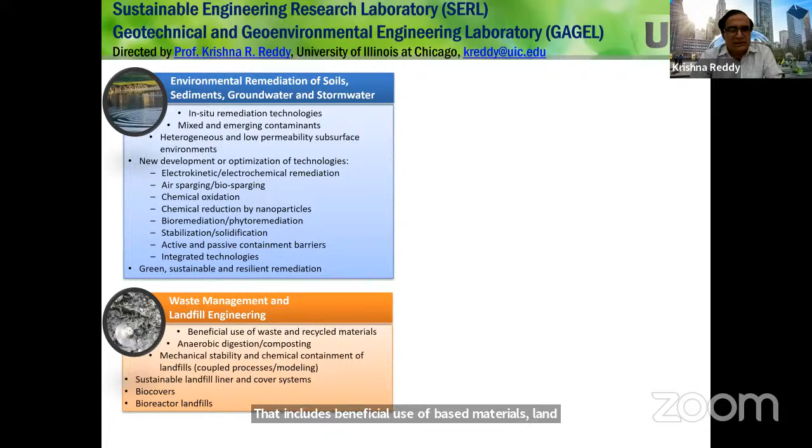And then for the past few years, I've been working on life cycle assessment and sustainable and resilient engineering. Here, I'm more focused on developing assessment frameworks that can be applied in any engineering field. So in my case, I applied the sustainability assessment frameworks to assess sustainable infrastructure, waste management systems, remediation systems, and so forth. So it has very broad applications. And then my background is geotechnical engineering.

My master's and PhD were in geotechnical engineering, but my bachelor's, as many of you, is in civil engineering with structural engineering as a specialization. These first two topics you see, environmental remediation and waste management and landfill engineering, come under the subject of geo-environmental engineering. Whereas this third one, life cycle assessment, sustainable and resilient engineering, is kind of very broad and has become a very hot topic these days.

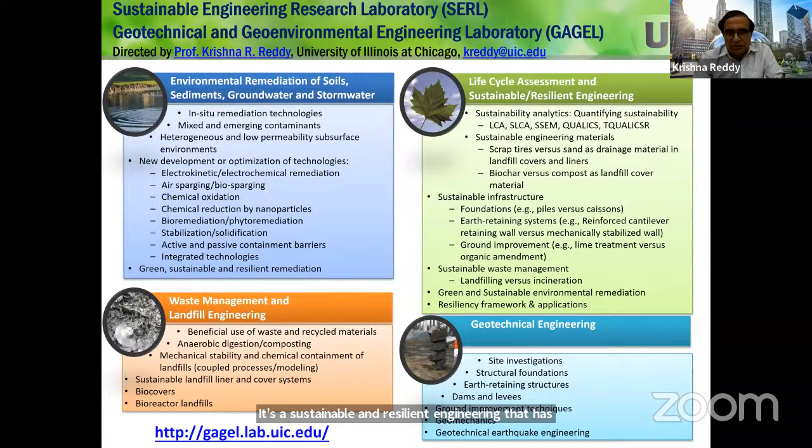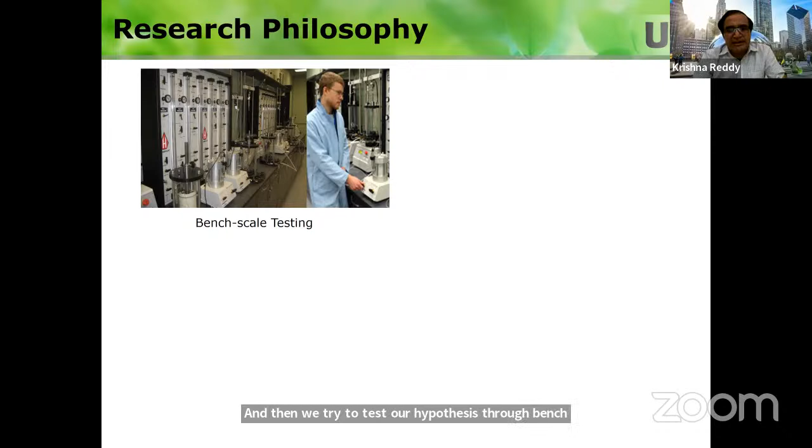I just want to give you a little bit about my research philosophy. We identify a real world problem. What is the problem that is there? And we try to come up with a hypothesis for a solution. Then we try to test our hypothesis through bench scale testing in the lab. And if we find success, we scale up and do the testing in the lab again, because it's easy to do testing in the lab compared to doing anything in the field, because in the lab we can systematically control the variables and understand the fundamentals.

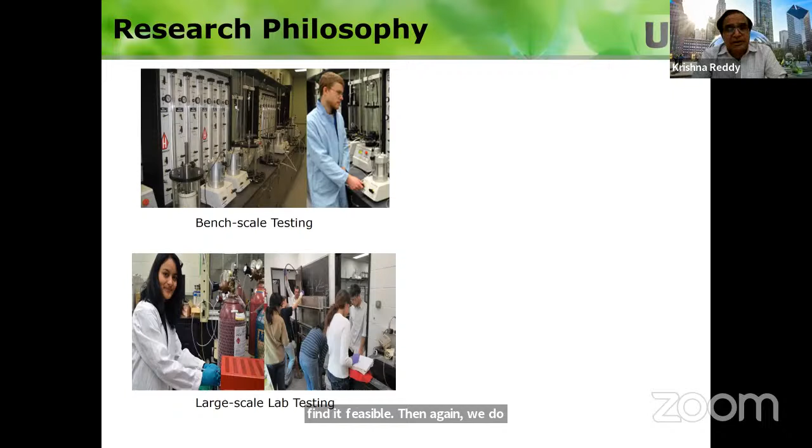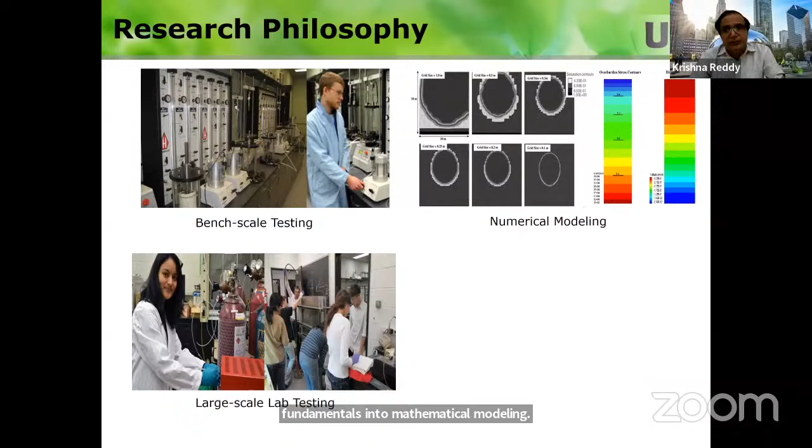Again, in the large scale testing, if we find it feasible, we try to understand the fundamentals, and then we incorporate all these fundamentals into mathematical modeling. Mathematical modeling is a way to scale up what you have done in the lab to a field scale scenario. Through modeling, we scale up and design the field systems.

In the field systems, we first want to test if it works or not. So we do a small scale pilot scale testing. We go out to the field and do small scale testing in a small area and see if what we came up with is feasible or not. If it works out in the field, then we develop design recommendations for practitioners to use and implement those solutions. We follow this systematic approach in all the projects we work on.

We are in a university, so our duty is to advance the fundamentals, but we have an obligation to the society to solve real world problems. So I always say that we are advancing the fundamentals, while at the same time trying to develop very practical solutions to real world problems.

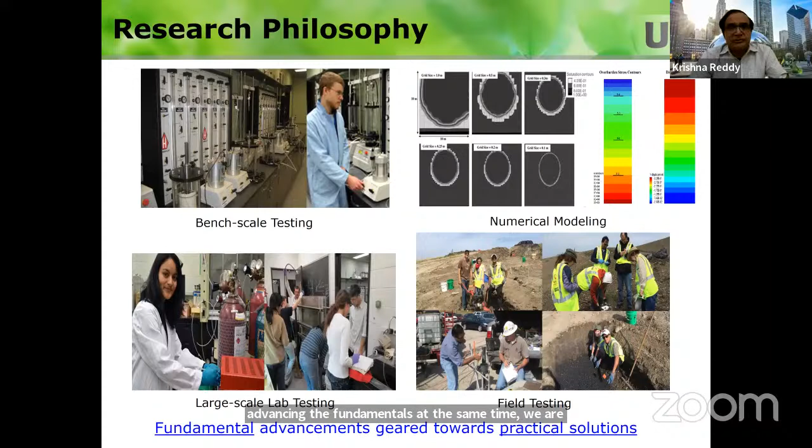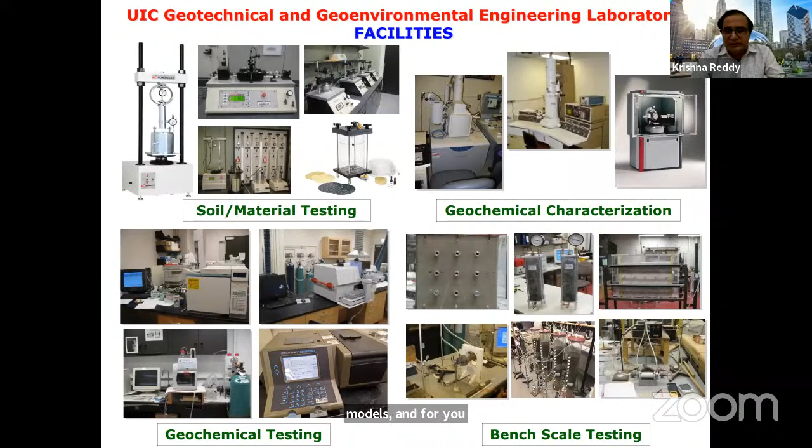So I do a lot of experimental research. This is my lab. We have soil and material testing equipment, geochemical characterization equipment, geochemical testing equipment, and bench scale testing setups. Depending upon the project, we create small scale models, and for small scale or large scale lab testing, we use these things.

Over the last 25 years, I have had the privilege of working with research students and scholars from all over the world. In the US, we get students from all over the world, so it's very nice to work with these talented students. Not only do we work together on technical issues, but it's very enriching to interact with a culturally diverse research group. We talk about language, food, social activities, and families, so it's a very enriching environment.

I always tell people I have the best job in the world, not only because of doing interesting technical stuff, but also in terms of interacting with these research students and scholars. So I really enrich my understanding of society and cultural aspects through these interactions.

So let's come back to the presentation. As I said, I want to give you a brief introduction to geo-environmental problems, and then explain some of the geo-environmental engineering solutions that we have. Going forward, we need to be thinking about geo-environmental engineering solutions that are sustainable. So now the question is, how do you say an engineering solution is sustainable? How do we quantify the sustainability? I'm going to show this through two examples so you can understand this.

Many participants are from India, and in India, you don't have proper engineered landfills. So you have mostly dump sites, and dump sites can create a lot of problems. You have air emissions, water pollution problems, and land contamination. You hear in the news all the time that a landfill is on fire and it's emitting all kinds of gases. That is obvious, you can see it, but a lot of things you don't see are leachate infiltration into the subsurface or into the surrounding water bodies, contaminating the waters and the land surrounding it. So a lot of health issues and damage to environment as a result of these uncontrolled waste dumps.

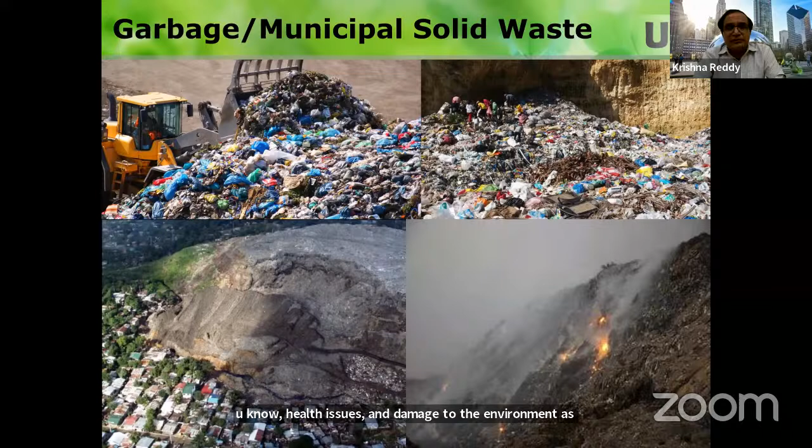You also have a lot of industries generating a lot of hazardous waste, and you wonder what they're doing with this waste. Not everything is recyclable, and eventually some of these things have to be gotten rid of. A lot of times these things are thrown indiscriminately, and you have a lot of toxic substances that enter into the ground and into the groundwater, or through surface runoff, into the surface waters. So it's a huge problem with these hazardous waste issues.

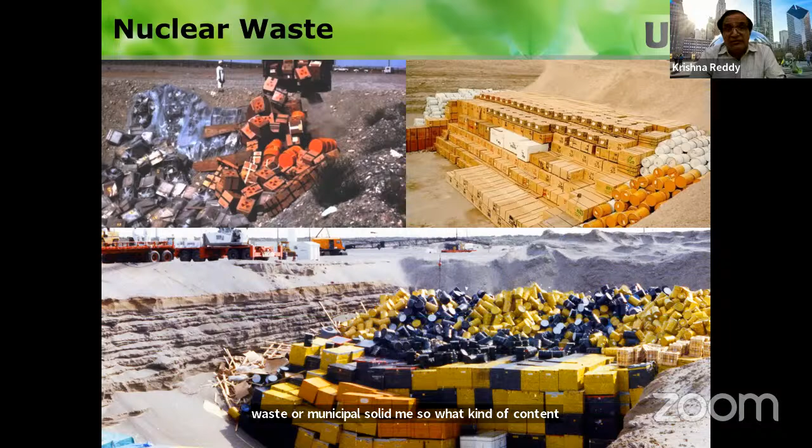Then you have nuclear waste. Nuclear energy is considered as zero greenhouse gases, and it's considered to be clean energy. But the biggest problem with nuclear energy is the creation of this nuclear waste, and this is going to persist for many years. So what do you do with these things? A lot of times we contain it, and the containment facilities for this highly toxic nuclear waste have to be much more stringent than hazardous waste or municipal solid waste. So what kind of containment systems do we have to have for nuclear waste - that's a huge problem.

The mine waste - India has a lot of mines, and many other countries have mines. The bad part of mining industry is that you recover the resources you want, but then you create a lot of waste - mine tailings and whatnot, other types of process liquids that are generated. How do you handle those things? A lot of times you see they are not handled properly. So if you have some kind of physical damage to containment facilities, you have release of all the toxic substances. And if you don't have liner systems at the bottom and all those things, then a lot of this contamination is entering into the subsurface and causing a lot of problems.

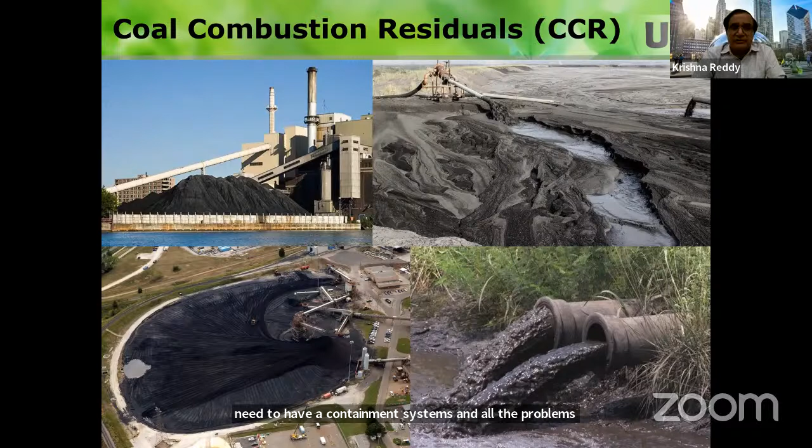And even related to power plants, coal-based power plants - in India we have a lot of coal-based power plants, and many countries have it. Now, because of climate issues, many of them are closing. But one of the byproducts of this coal power industry is coal combustion residuals like fly ash, bottom ash, FGDs, and those kinds of things. A lot of times they are mixed with water and pumped to impoundments, and the impoundments are not lined. So a lot of things leak into the ground, a lot of discharge into the surface waters, and a lot of problems associated with these things. So new government regulations came into existence in the US - now you need to have containment systems, and all the problems that were caused need to be fixed. So it's a huge problem to deal with.

So as you know, a lot of industrial waste - steel slag, carbide lime, asphalt waste, fly ash, slag, all kinds of these things are being produced in enormous amounts all over the world, including India. So what do you do with these things? They are being stockpiled or indiscriminately stored at the plant sites. I see a lot of people trying to use these materials as construction material, and you need to be careful from a geo-environmental perspective. You need to see if they are environmentally friendly to use or not. A lot of times people do physical and strength testing, mechanical testing, but you need to look at leachability and any kind of toxic substances released from these materials. So reuse of these materials is great as long as you're not causing any environmental issues with this. There's a large problem with the use of industrial waste and not causing any environmental problems.

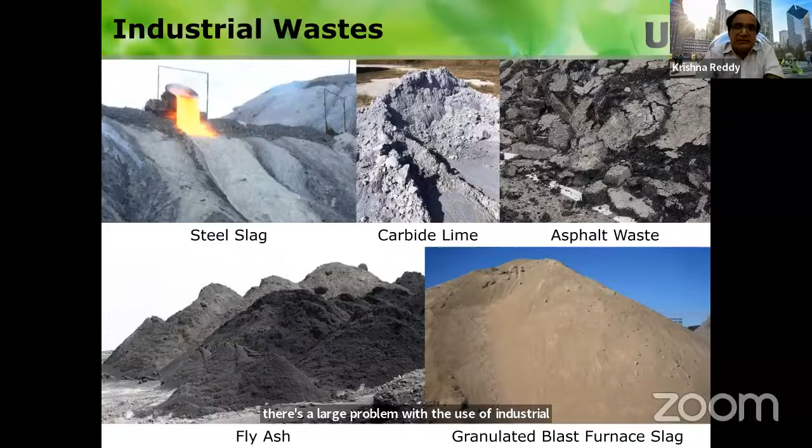So then you have polluted sites. I have shown these pictures. At some sites you can see at the surface what is wrong in terms of the contamination. But at a lot of sites you don't see anything. Everything looks normal, but maybe somebody buried something underground, or there was some accidental leakage or spillage. So soils and groundwater at that site could be contaminated, and that can pose a lot of problems.

If the contamination goes into the groundwater, you could be drawing the contaminated groundwater, drinking it, and you could get a lot of diseases out of that. And even contamination spreading, or contamination in the soil—if you grow any crops on contaminated soil, the contamination is going to be uptaken by the plants. It could contaminate the food chain, and as a result, people can be adversely affected in terms of health. So there are a lot of issues with polluted sites.

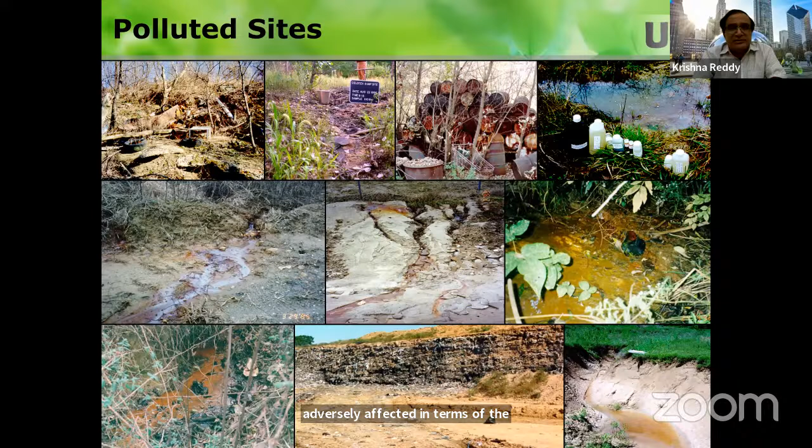And then recently we are looking at climate impacts. You probably have seen or heard about greenhouse gases, climate impacts, extreme hazards that are happening. In some places you have extreme flooding, some places extreme drought—all kinds of these weird climate impacts are being faced. As a result, a lot of things that were designed in the past didn't consider these impacts. They never designed for this kind of flooding situation, or heavy storm events, or in the coastal area sea level rise, or surge protection. So we are now dealing with a lot of these issues, designing these containment systems in order to incorporate these extreme hazards. That's a huge challenge that people are facing.

So those are all the geo-environmental problems. I call it—you could call this environmental problems, but I call it geo-environmental problems because all of them have to do something with the soil, groundwater. So anything that is related to geomaterials, I want to call it geo-environmental problems.

So now, these problems have been there for a while, and engineers, especially geo-environmental engineers, are working on different solutions. A lot of advancements have been made by geo-environmental engineers. So before I talk about those solutions, what is this geo-environmental engineering?

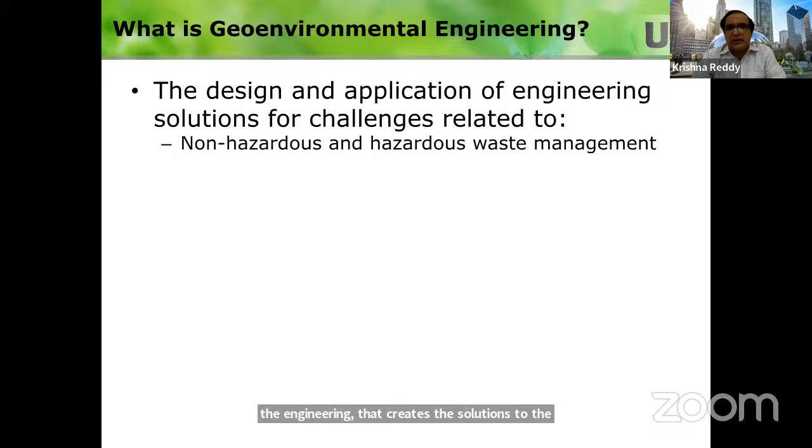Some of you may be hearing the term for the first time. So geo-environmental engineering is nothing but the engineering that creates solutions to geo-environmental problems, non-hazardous and hazardous waste management, characterization and mitigation of contaminated sites, and addressing the issues of environmental sustainability and resilience. So it's all about designing and applying engineering solutions to address these problems.

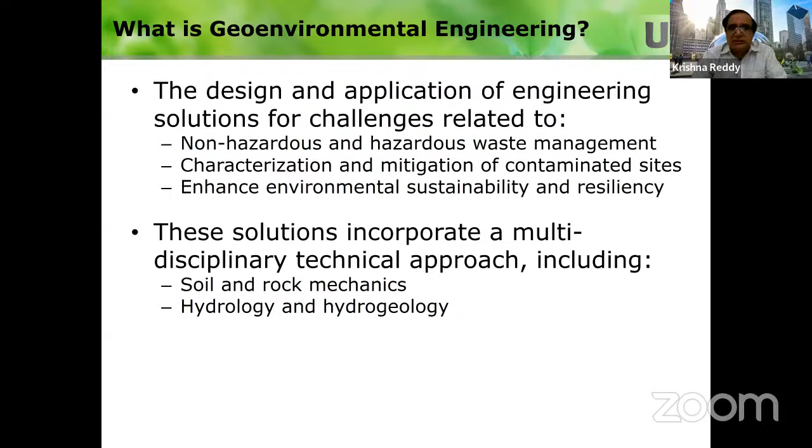Okay, so these solutions require some multidisciplinary technical approach. Just if you have a geotechnical engineering background, you know soil and rock mechanics, but that's not enough. So you need some background on hydrology and hydrogeology, and you also need some background on geochemistry and biochemistry, and then you need to have some background on contaminant transport and transformation, and human and ecological health risks.

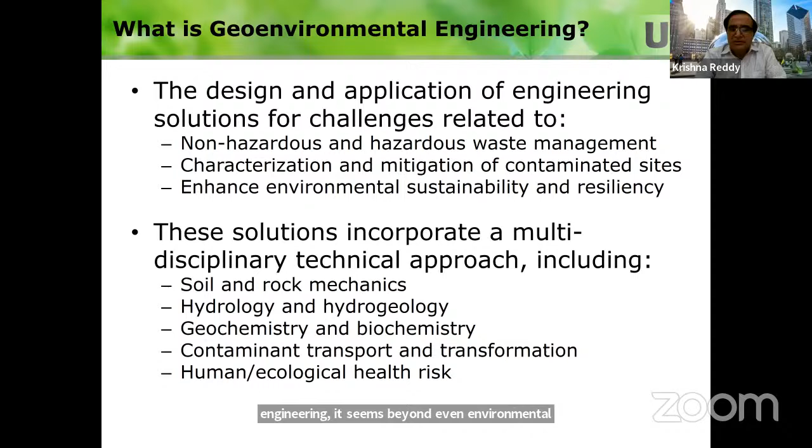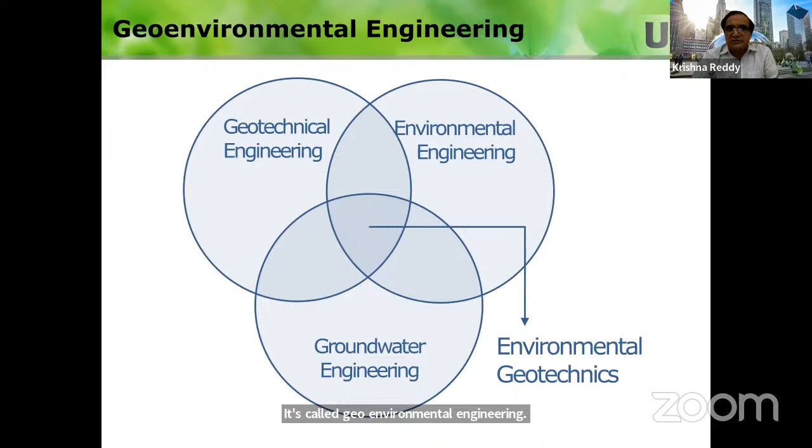So it's beyond geotechnical engineering. It's beyond even environmental engineering. So it's a combination of these two fields. That's what geo-environmental engineering is. So geo-environmental engineering is geotechnical engineering, environmental engineering, and groundwater engineering. This field is also commonly known as environmental geotechnics, but in a broader sense, in a broader scope, it's called geo-environmental engineering. So instead of just talking about these three subjects, now geo-environmental engineering has evolved to be a truly multidisciplinary field.

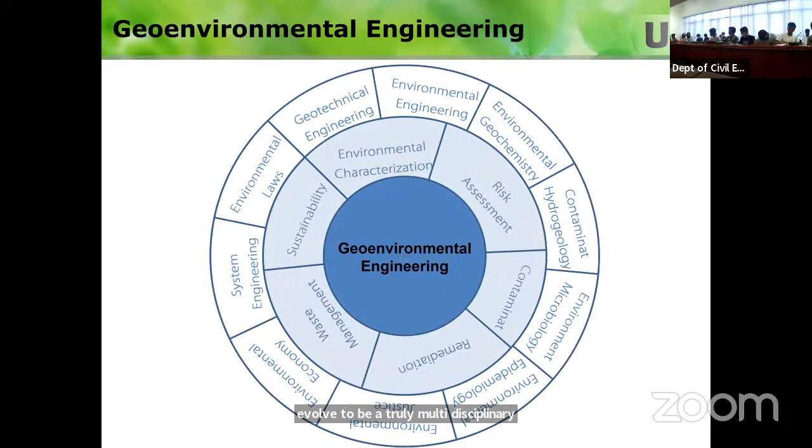So for example, in geo-environmental engineering, we're going to look at environmental characterization, risk assessment, containment, remediation, waste management, or sustainability issues. And in order to address all these issues, you need to have a geotechnical background, environmental engineering background, environmental geochemistry, contaminant hydrogeology, environmental microbiology—all these things are needed. I'm showing all of them with the same size, but some of them you need a lot. For example, geotechnical engineering and environmental engineering scope is much more than the other things.

So a lot of times the question arises, how do I get so much diverse background to work in geo-environmental engineering? You don't have to be an expert in all of them. This is where you need to work with your colleagues from environmental engineering. If you are a geotechnical engineer, you need to work with an environmental engineer, or if you are an environmental engineer, you need to work with a geotechnical engineer. But we also need to draw background from biogeochemistry, microbiology, and even look at environmental justice, economic issues, and environmental laws. So you need to incorporate this broader background through collaborations.

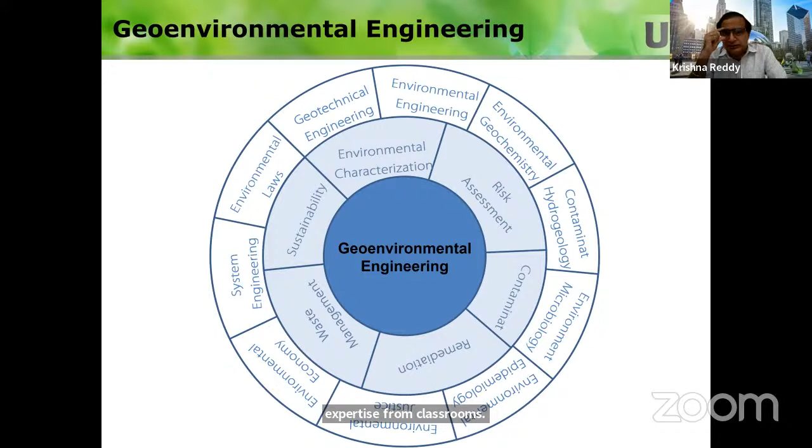But these days, a lot of universities are offering multidisciplinary courses. So the students studying now are getting a lot of this expertise from classrooms compared to the time that I went to school. So if you want to get a little bit more background on how geo-environmental engineering has evolved over the years, I recommend you look at this article that I wrote in 2014, just to get an idea about how this whole field has evolved.

So we have been working on this field for a while, and we have developed a lot of the solutions to the problems. So, for example, we have engineered waste containment systems, also called landfills. So we have developed the bottom liner systems, leachate collection systems, and the final cover systems. So this is the outcome of geoenvironmental engineers, and they are being used in US and other developed countries quite commonly, and we don't have any issues of waste management. We don't have any waste dumps.

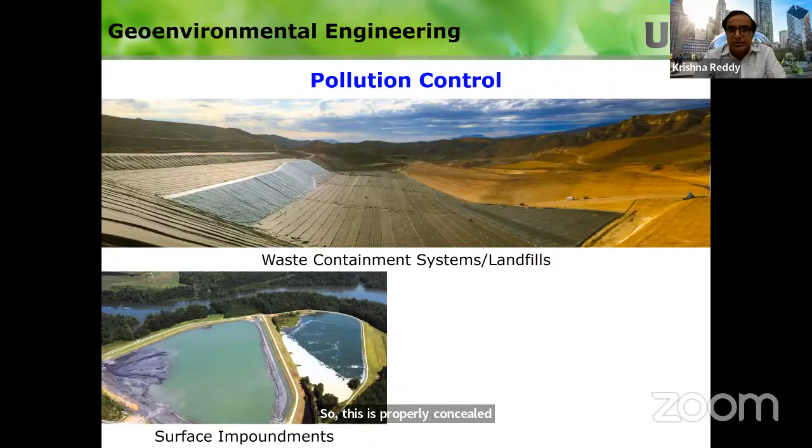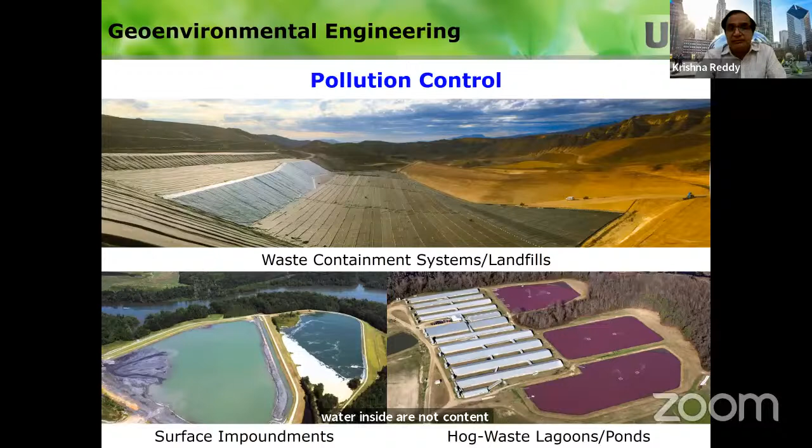So waste is properly contained in the systems, and if you have a liquid waste, you have surface impoundments with proper lining systems, and you have lagoons or ponds. They all have liner systems so that soil or groundwater at the site are not contaminated. So these things are well established.

And if the soil or groundwater is contaminated at a site, what can we do to make sure that it should not cause more damage? Then we need to have some engineered solutions. So these are called pollution containment systems or control systems, like vertical barriers, like slurry walls that we can build around the contaminated zones, to make sure that contamination does not spread. So these technologies are also well established and are used very commonly.

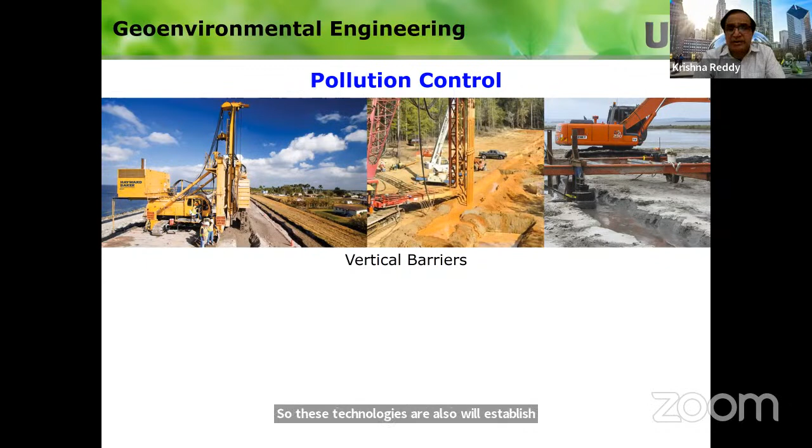And then, at some sites, you put the capping system. So once the waste is filled up, or you want to close a waste dump, one of the things that you can do is put an engineered cap on top of them, so that you will avoid all kinds of problems associated with the exposed waste. So again, these capping systems are well designed, and a lot of work has been done, and many projects have used these cover systems.

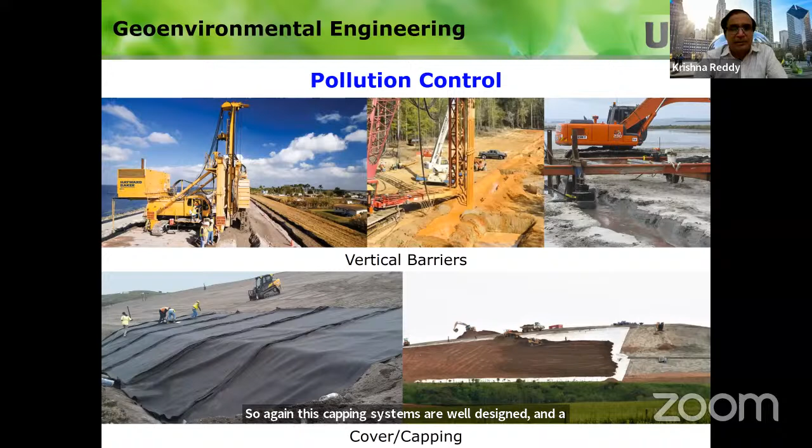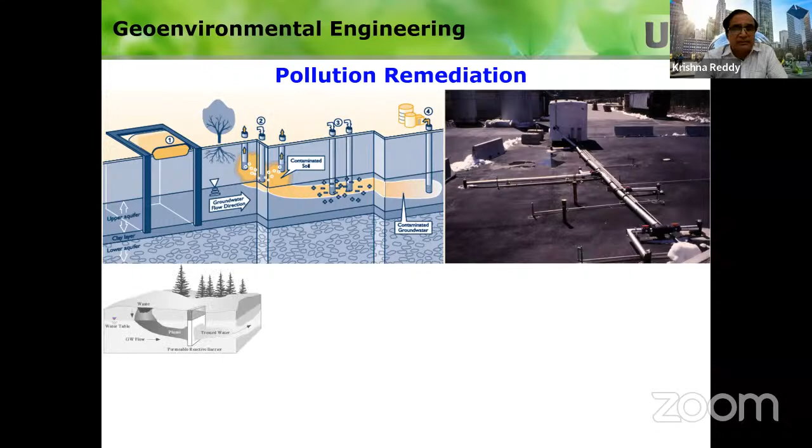Then in terms of soil and groundwater remediation, there are many technologies that have been developed to remediate the soil or groundwater. There could be soil remediation technologies, groundwater remediation technologies. They could be in situ technologies or ex situ technologies. The technologies could be based on physical processes or chemical processes or thermal processes or electrical processes or biological processes. So based on all these factors, we have a number of technologies.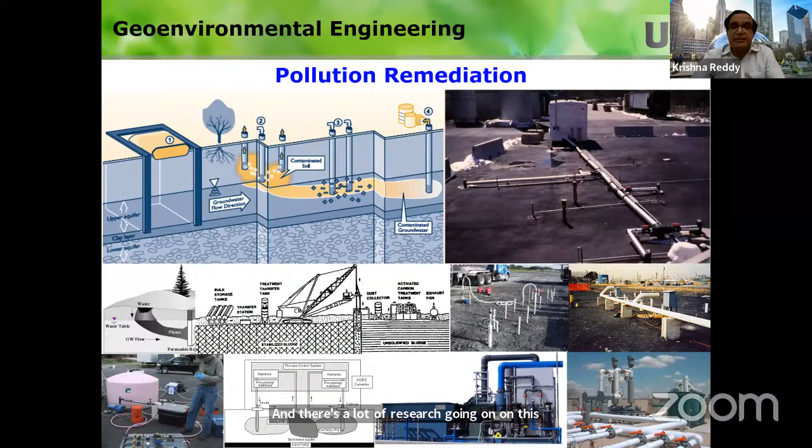So what you have to do is look at the site conditions, soil and groundwater and contamination conditions that you have, and then you have to choose the appropriate technology that best fits the site. So it is important for people working in this field to know all the available technologies so that they can pick the right technology depending upon the site. And there is a lot of research going on these remediation technologies to further optimize them, make them more passive, less expensive. So a lot of work has been done and is being done on these things.

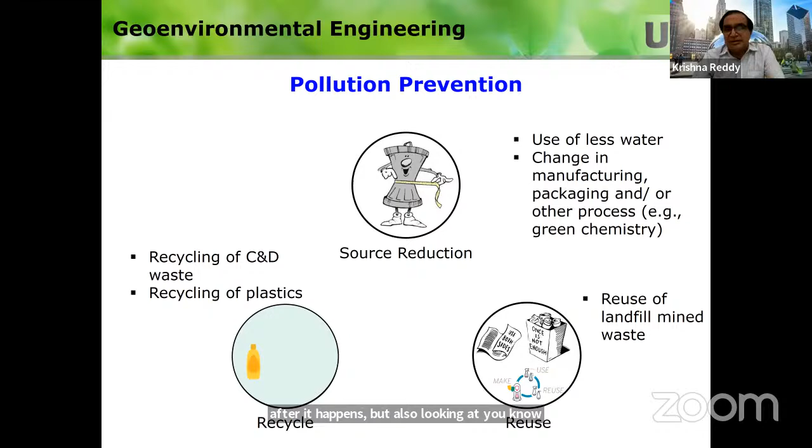And there's a lot of research being done on pollution prevention. So, for example, source reduction. You don't want to have the contamination to start with, and reuse of the waste materials, and then recycling of the waste materials. So there is a lot of work going on. It's not just about addressing the problem after it happens, but also looking aggressively upfront, not to cause the problems that need to be addressed again in the future. So a lot of work is going on in this field.

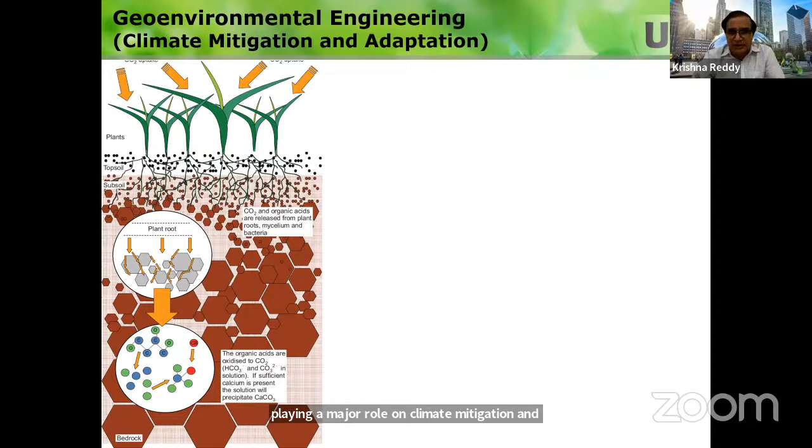And recently, if you look at the literature, geoenvironmental engineers are playing a major role in climate mitigation and adaptation. For example, growing plants for carbon sequestration. That's a huge area of research. And also underground carbon sequestration is an important topic, because if you have to immediately reduce the CO2 concentrations from the atmosphere, this is one way, but there are a lot of challenges to that one.

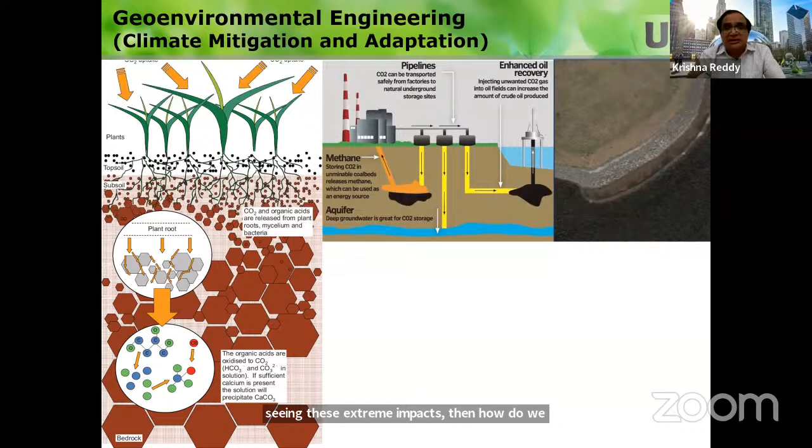And not only trying to reduce the CO2 from the atmosphere, but we already have a lot of CO2 in the atmosphere, and we are seeing these extreme impacts. Then how do we address the extreme impacts? So now people are looking at it: how do we protect? For example, if I have a landfill close to the coastal area, sea level is going to rise, or surge is going to be high. So how do we protect it?

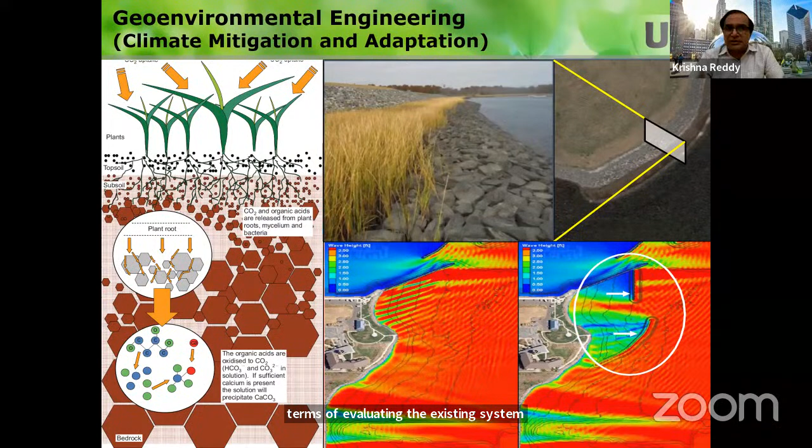So now people are actively going back to the sites where some remediation has already happened, and they're retrofitting them because of these expected extreme events. So a lot of modeling work is also going on in terms of evaluating the existing systems for climate impacts. So there is a lot of work going on in this field.

So we have these geoenvironmental engineering solutions, but the problem so far, and in fact in other engineering fields it is also true, is that we didn't consider sustainability in developing the engineering solutions. Now, I'm sure many of you heard about the term sustainability, right? These days, sustainability is a term that is used very commonly, whether one understands what it really means or not, right? Everybody is using it as a buzzword.

And everybody uses this definition: sustainability or sustainable development meets the needs of the present without compromising the ability of future generations to meet their own needs. I like this definition. It's very simple, very powerful. It conveys the message. What it is saying is, let's not do anything bad right now that can compromise the current generations and definitely compromise the future generations.

So when you see this definition, you ask yourself a question: are we doing something bad now that could affect us and future generations? In fact, the answer to that question is yes. Some of them are in our control, some of them are beyond our control. One of the biggest problems in terms of addressing sustainability is the exploding population growth and consequent impacts.

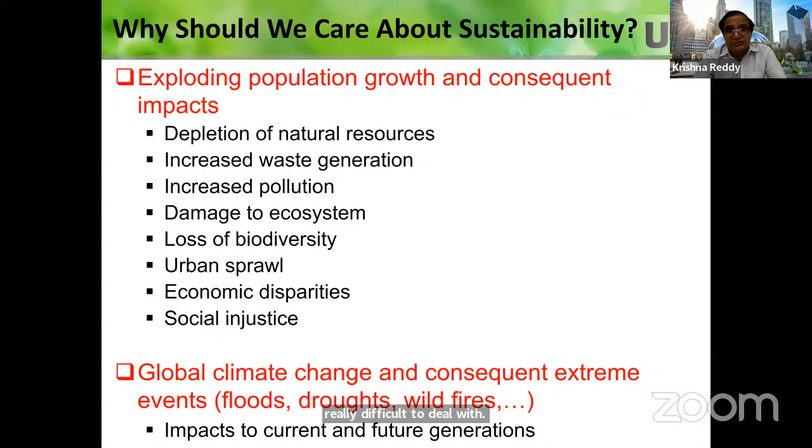In India, in many places, you never heard about these extreme floods. Some places it's droughts, wildfires. For example, in the US, West Coast, California and other places, we never saw so many wildfires, and we are seeing all of those things. So these kinds of impacts are going to generate problems for the population now. And also, if we don't control the greenhouse gases, the climate is going to get worse and worse, and in the future it is going to be really difficult to deal with. So we need to do something, because we need to expect that these extreme events are happening, and how do we address those things in our engineering solutions.

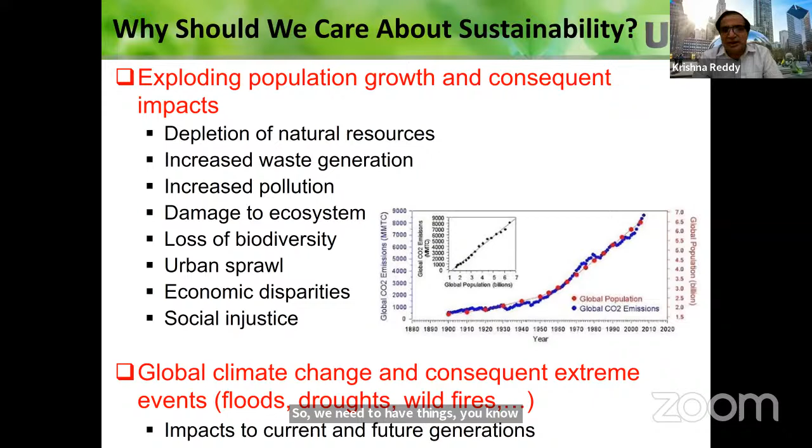So I'm showing this graph; it conveys one important message. What I plotted here is the year on the x-axis, CO2 on the first y-axis, and population on the second y-axis. As you see, population and CO2 have a good correlation. What it means is that these greenhouse gases are increasing because of the population growth and doing business as usual. So we need to have things changed. Otherwise, the future looks really bad.

So all of you, every engineering student and engineering professional, have to understand that the UN, the United Nations, has realized that sustainability is a big concern globally, and they developed the 2030 Sustainable Development Goals, SDGs, and many students learn these things in schools or otherwise. We have 17 goals with 169 targets, and they started from January 1st, 2016.

And one thing I want to mention is, I see people picking up some of this stuff and then talking about them. But in fact, all of them are interlinked, some of them in a strong way, some of them in a weak way. But I don't like to see people taking one SDG and saying, oh yeah, we're going to work on this one.

Because you have to look at the interlinking of one SDG to other SDGs. I have given some presentations on how they are interlinked in the past. So no matter who you are, whatever you can do, you have to start working on these things now.

Now, if you are working in geo-environmental engineering or as a civil engineer, you ask the question, what should we do specifically? Sustainability can be done at different scales. You can contribute to sustainability through global scale, national scale, regional scale, business or institutional scale, or sustainable technology scale. The global scale is like the UN. National scale is the country coming up with a policy. Regional scale, maybe your state or some area in your state is coming up with a policy.

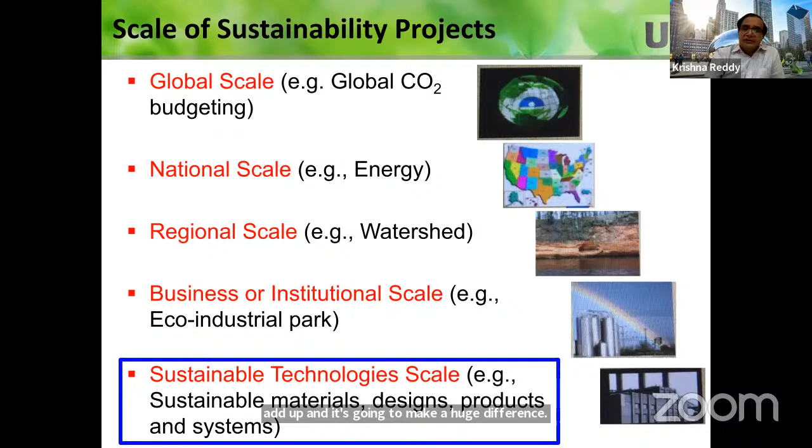What I'm trying to say is, don't worry about sustainability being a global problem, but you can do something at a local scale. As an engineer, you can do something that can overall contribute towards global sustainability. Even if all of us do something in our daily activities, all of those efforts are going to add up and make a huge difference. So everything that we do now, just ask yourself, is this sustainable? Keep the sustainability question in mind whenever you are making decisions.

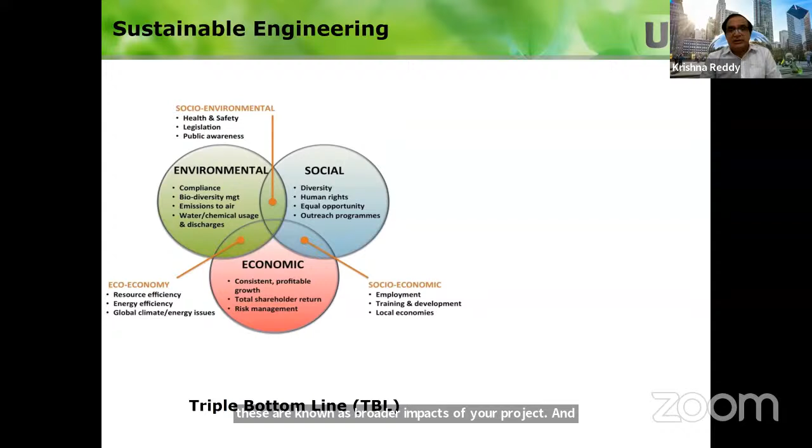Sustainable engineering is now a new field. Basically, you have to design for performance and safety like we do in the conventional way. There's nothing wrong with that. And we look at the economic cost implications and ease of construction. The conventional approach is good, but we need to ask these triple bottom line aspects. Are there any broader environmental impacts of your project? What are the social impacts? What are the economic impacts? These are known as broader impacts of your project, and these need to be addressed.

Engineers generally don't even think about the life cycle. A lot of times we say, if I want to build a bridge, we pick the materials, design a steel bridge or concrete bridge, and give it to the contractor, who gets the materials and builds it. It's not like that. When you are designing sustainably, you need to look at where the raw materials come from, what it involves to make those construction materials, like manufacturing cement, steel, or preparing concrete, the transportation to the site, the impacts of construction, and maintenance of the structure.

And we need to think about the design life, 50 years, 100 years, whatever it is. At the end of the life period, what are we going to do when we demolish that structure? How much of it can be recycled? How much needs to go to the landfill? When we talk about sustainability in design, we are talking about making sure your design meets the performance. For example, if I'm designing a column for a structure, it should take the load. That you cannot compromise. But what are the other impacts?

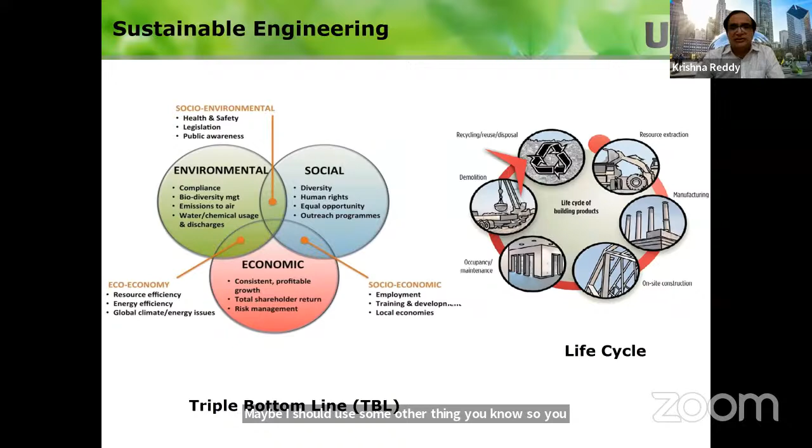When you assess these impacts, you might find the solution you're using has a lot of negative impacts. Maybe I should use something else, so you get those ideas and can change things around to make your design more sustainable. I recommend you look at this book, Sustainable Engineering. We wrote this book mainly to give a very practical perspective to sustainable engineering. How can we actually do something for sustainability? How do we design sustainable systems?

As I mentioned, there are a lot of talks, and at the end of listening to those talks, if you ask yourself, what can I do with the stuff I listened to, a lot of times you don't get anything out of them. So this book is a practical way to do something in terms of sustainable designs.

So this is the functional definition of sustainability. You saw that broad definition, the Brundtland Commission definition; that's a more philosophical definition. The functional definition is this triple bottom line. So you need to basically look at all the environmental impacts. So when I was talking about this, you need to look at the triple bottom line impacts.

So the environmental is much broader. So you have to look at all these things. What is the greenhouse gas emission that's going to be from your project? Air pollution, energy, water usage, these kinds of things. And we never talk about these things, right? Whenever we teach about structural design or foundation design, we never talk about these things. Now, everybody has to calculate these environmental impacts, no matter what you are designing.

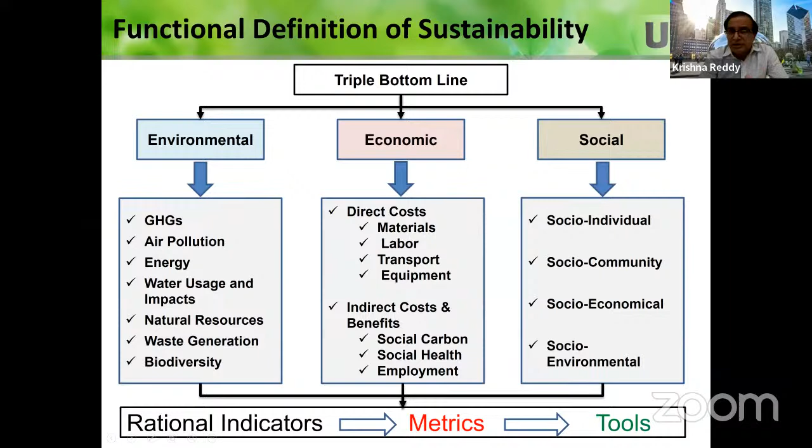So sometimes you use surveys and use the rating as the metrics, but we need to have tools to calculate those metrics. So if you have indicators for environmental, economic, and social that have metrics, and if there is a way to calculate those metrics, then you can do the sustainability assessment and quantify the sustainability. But also remember that life cycle is very important. So you need to look at raw material acquisition, material manufacturing, transport, construction, operations and maintenance, all these things, as I mentioned, the life cycle, and the end of life.

For each life cycle stage, you need to consider the triple bottom line. So you need to consider the environmental impacts, economic impacts, and social impacts. So for each stage, you have all these impacts. Now you have this large list of environmental indicators, economic indicators, and social indicators. Now, how do I make a decision which one is more sustainable?

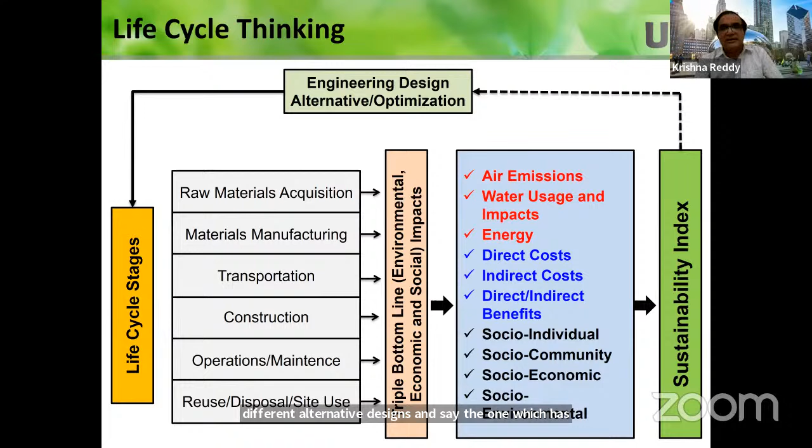So if you have alternatives, if I want to compare alternative 1, alternative 2, and alternative 3, how can you say which one is more sustainable? So if there is a way to combine all these several indicators and metrics into a sustainability index, that will be great, right? So if you have one value at the end, let's call it sustainability index, then based on that, you can evaluate different alternative designs and say the one which has the high sustainability index is the best option, right? So that's what we did.

Sustainability index can be calculated using this multi-criteria decision analysis. This is the framework that we developed. So you have indicators, criteria level, requirement levels, and you have those numbers, and you can apply the weighting factors if you want, because not all of them may be equally important. So you can make those considerations, and finally, you can calculate the sustainability index, okay? So you're using this multi-criteria decision analysis, and maybe you have to use the analytical hierarchy process to come up with the relative weighting factors.

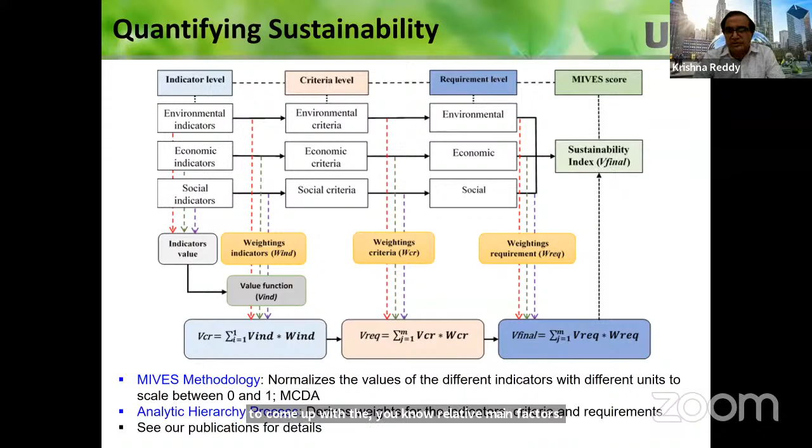So there is a publication for more details on this one. I highly recommend you to go to my website and then download the paper that I have written on this one. So what I'm trying to say is you have to have this sustainability assessment framework so that you can assess whatever you have designed, is it sustainable or not sustainable?

Otherwise, if you show me something and say, is it sustainable design? If you ask me, I might say, yeah, it's sustainable. And the second person might say, no, it's not sustainable. Third person may say it's not sustainable. So we can have an argument, but when you quantify the sustainability in terms of numerical metrics, then there is no argument. So numbers will speak for themselves.

So just let me demonstrate this approach with a case study, okay? So let's say in geo-environmental engineering, we deal with contaminated sediment. You have a lot of lakes, rivers, you have sediment at the bottom that is polluted, and it's very important to clean up that pollution. That problem is there worldwide. I know you are dealing with it in India also, lakes, rivers, the Ganga project, all those things, because the sediment is a major concern.

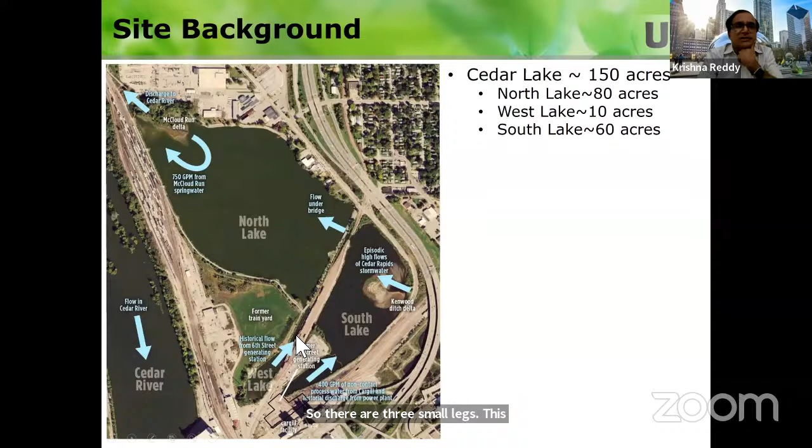So this is a project that is in the US. These are the ponds that have been found to be contaminated. So if you look at these three ponds, a close-up view of the ponds is this. This is the river that goes by. But along the river, we have these lakes. So there are three small lakes. There's the North Lake, South Lake, and the West Lake. And these were created, and there's a railroad line that goes across it.

And these lakes served to supply the cooling water to a coal power plant that was right next to these lakes. And then all the storm water, whenever it rains in the neighboring areas, comes into these lakes. So as a result of all these activities, a lot of contamination entered into these lakes. The sediments are contaminated with pesticides, PCBs, PAHs, and metals. All of these are highly toxic if you get exposed to them.

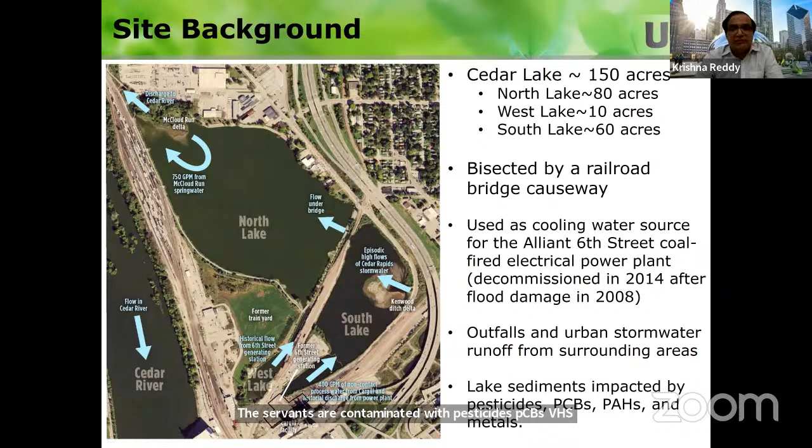So now, the coal plant is shut down. Still, that stormwater is going into this one, but they want to develop this as a nice park that people can use. They can canoe and go with their families for picnics and other things. So they want to convert it into a very nice park. But the problem is the sediments are contaminated. As a result, water is going to be contaminated, and you don't want to have children swimming in these lakes, right? So that's why the plan is, how do you clean up those sediments?

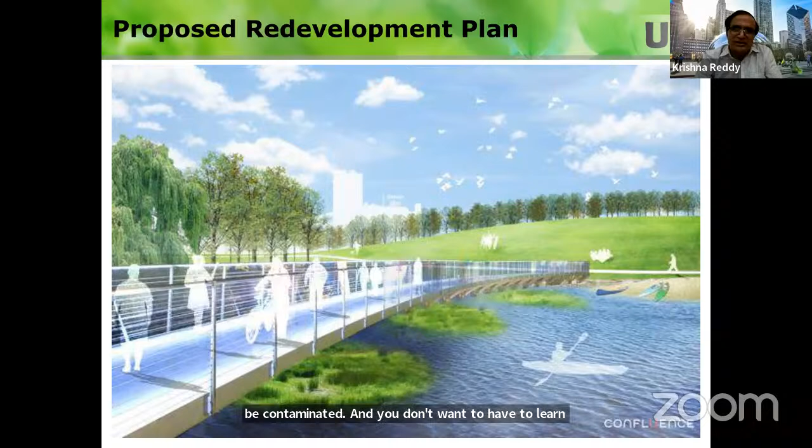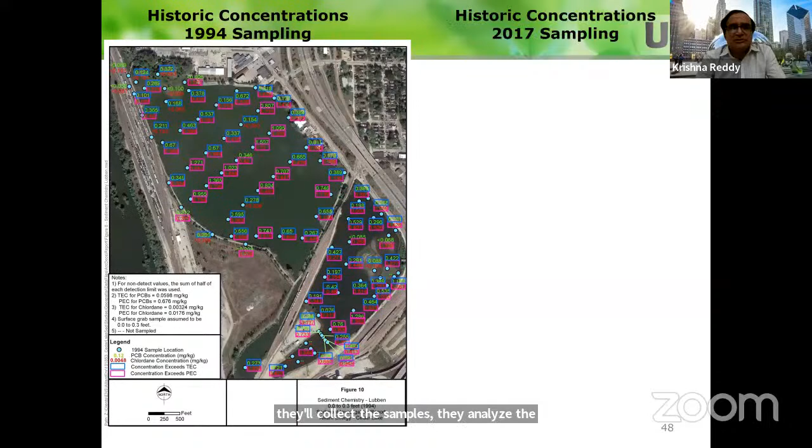So they did a lot of investigations from 1994. They collected the samples, they analyzed the chemicals. The ones that you see with the pink color show that concentrations are exceeding the allowable limits. And they did sampling in 2017, and see that the pink colors have decreased. So only these pink colors you see here.

So what is happening is, because the power plant is closed, and there is a little bit of control on the runoff that is coming into this one, the contamination that is there in the sediments is naturally degrading. So that's called natural attenuation.

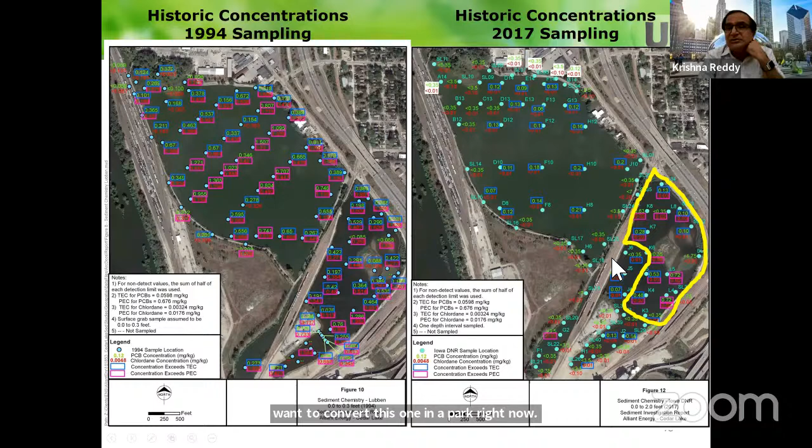But there's some area that you see, this bottom right area, where the contaminant concentrations are very high. So if they want to convert this into a park right now, they have to clean up these sediments. Otherwise, you're not allowed to develop this as a park or recreational area. So this is the area that needs to be cleaned up.

So what can we do? How can we clean this up? Just looking at the site conditions, you can come up with potential technologies. Monitored natural attenuation, called MNA, or other options like dredging and disposal, conventional capping, and modified capping.

Monitored natural attenuation is basically leaving the sediment right there and letting it degrade. But the degradation rate is so slow that it may not be acceptable. Dredging and disposal means dredging it out and putting it in a landfill.

Conventional capping and modified capping work this way. Conventional capping is basically putting a cap on top of the sediment. You have the sediment, and you put a multi-layered system on top using conventional soils, sand, and gravel material. You have a multi-layered system, so this needs a very thick layer.

The modified capping has a reactive core mat on top. It's more like a GCL. So you have a geotextile, and then a reactive material inside, and then sand on top, and riprap on top of that.

So if you talk about engineering innovations, this modified capping is an innovative solution because we can put a reactive material inside. As the contamination tries to diffuse from the sediment into the water, reactions happen, so you're treating the contamination. Whereas in conventional capping, there is no treatment, you're just containing it. Here, you are containing it and treating it. So modified capping can be thought of as an innovative solution.

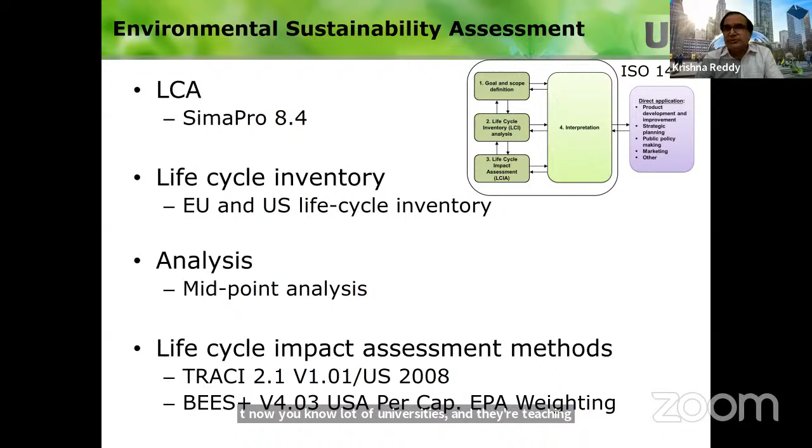Those can be quantified using tools like LCA, life cycle assessment. You have to have databases and impact assessment methods for this. LCA is being taught now in civil engineering curriculum. People weren't teaching this before, but now a lot of universities teach life cycle assessment, because this assessment can be used to assess the environmental sustainability of any engineering system.

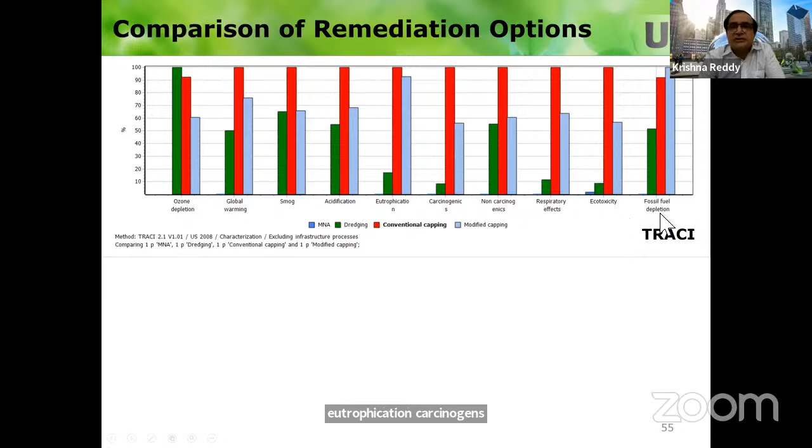If you do that kind of analysis, you get results like this. These are the environmental impacts on the x-axis: ozone depletion, global warming, smog, acidification, eutrophication, carcinogens, non-carcinogens, respiratory effects, ecotoxicity, fossil fuel depletion.

These impacts are often shown in a normalized manner so that one can easily understand them. MNA, you don't even see anything, since you're not doing anything, there are no impacts. The first bar, green, is dredging, red is conventional capping, and the other is modified capping. The smaller the bar size, the better it is, showing the relative impacts. As you see, in some cases dredging comes out better, and in other cases modified capping comes out better, so you need to look at the relative impacts.

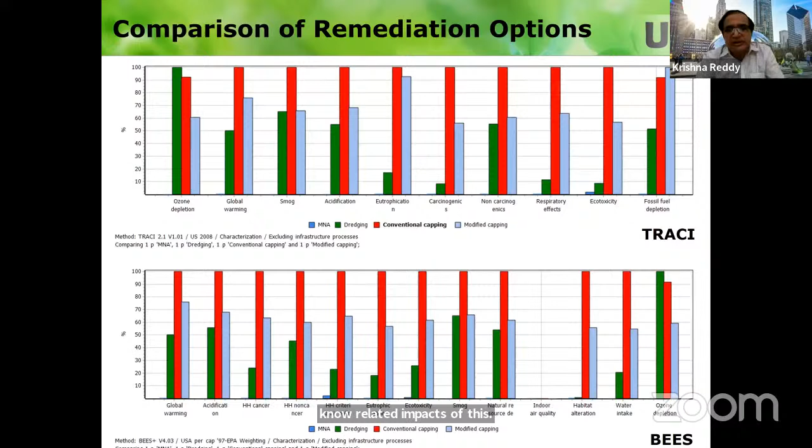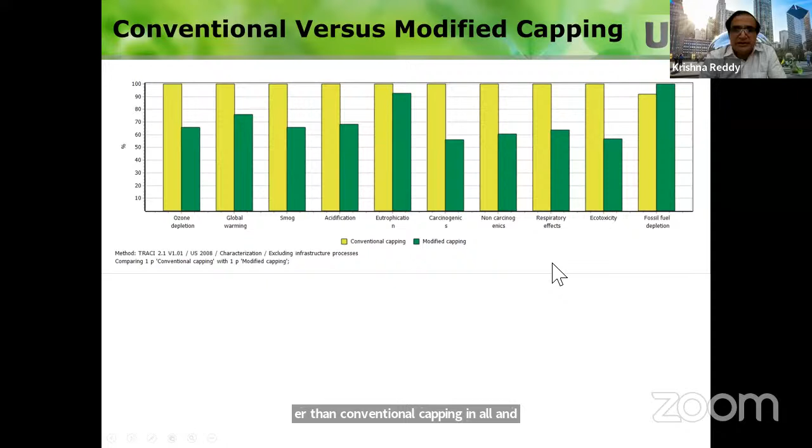How much is it going to cost? Obviously, MNA costs very little since you're not doing anything, but you need to go and monitor. You need to collect samples and do the chemical analysis, which involves a lot of cost.

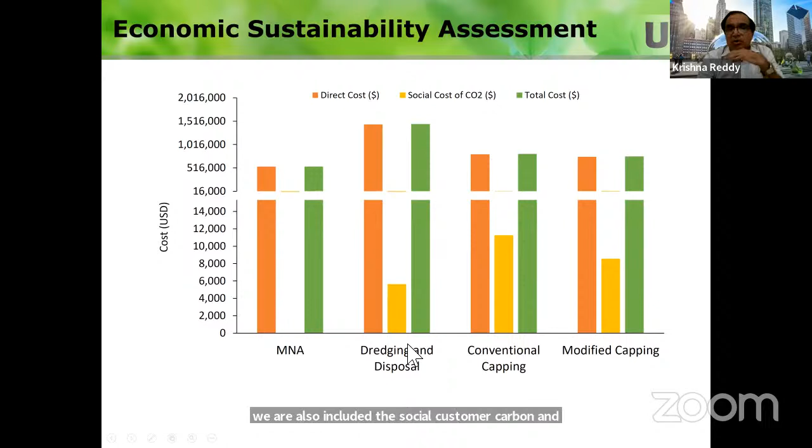And for dredging and disposal, how much is the total cost? Conventional capping and modified capping, you have direct costs, and we have also included the social cost of carbon, and then the overall total cost of the project.

Then we did a social sustainability assessment through survey. Basically you identify the stakeholders and prepare a questionnaire and ask them to rate from 1 to 5. What do they think about this option? So you create a survey on how individually one is going to be affected, how the community is going to be affected, how their economy is going to be affected, and how environmental is going to be affected.

Now, let's say I want to change this. Environmental is not a big concern, economic is not a big concern, but social aspects is a big concern, because this project is going to be used by people. If you don't consider the people's impact, people's perceptions, then the project is not going to be successful. So if you give high importance to the social aspects, this modified capping comes out to be the higher one.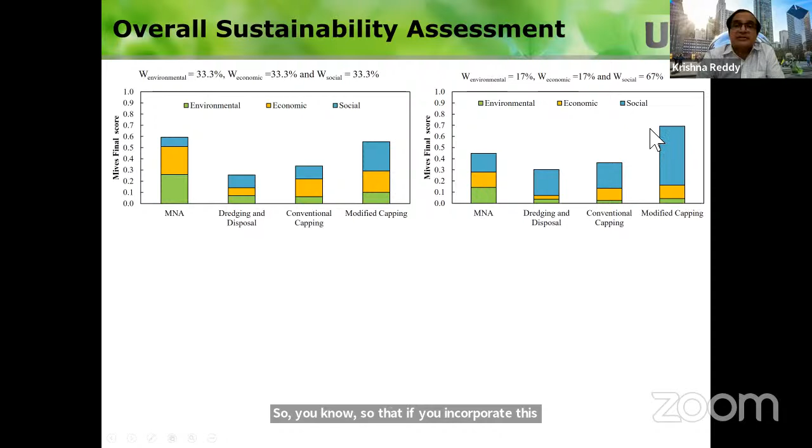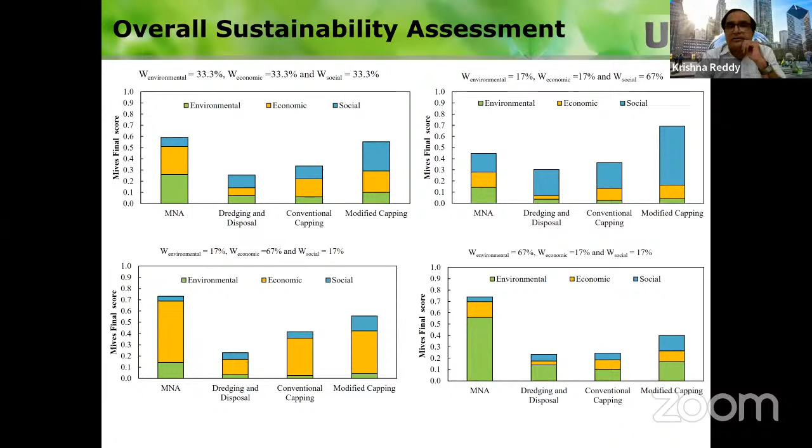So if you incorporate the social aspects, then modified capping may be the best option to go through. And if you look at economics as the more controlling criteria, then MNA comes out to be better. If you want environmental, MNA also comes out to be better. So in all these three cases, MNA comes out better, but if you consider the social aspects, then modified capping comes out to be better. So that's how we need to make a decision.

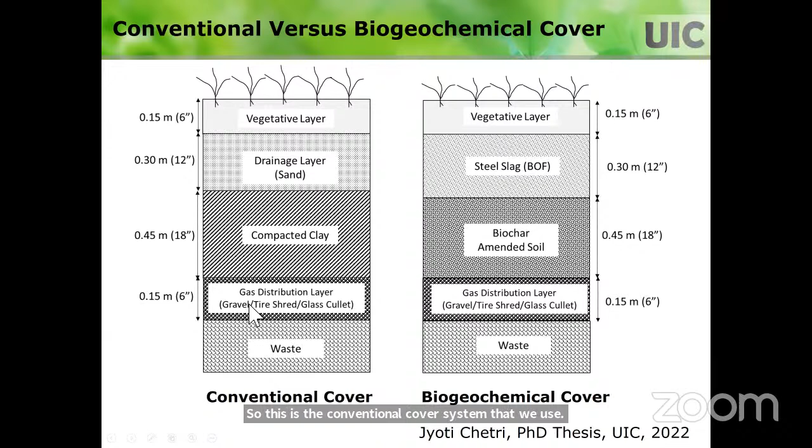So let me run through this second case study quickly. Let's say you have landfills or dump sites. You want to put a cover on top of it to control the infiltration and also to control the gases. So this is the conventional cover system that we use. You have waste at the bottom, a gas distribution layer, compacted clay, drainage layer, and a vegetative layer. What we are proposing is, instead of this, why don't we use this biogeochemical cover system?

This conventional cover system is good for not allowing the infiltration of precipitation, but it does not take care of the gases that come out. Whereas the system we are proposing allows you to control the infiltration and also control the gas emissions.

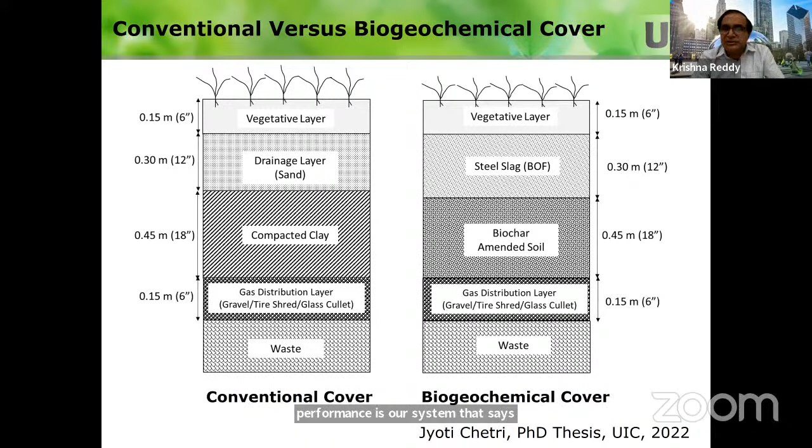The only difference is, instead of compacted clay, we are suggesting that biochar should be added to the soil. And then instead of a drainage layer being sand, we are looking at steel slag. So this steel slag and biochar are waste materials. Using waste materials is a good thing to do, and you are improving the technical performance of this cover system. That's even more advantageous. So we have a huge project to work on this one.

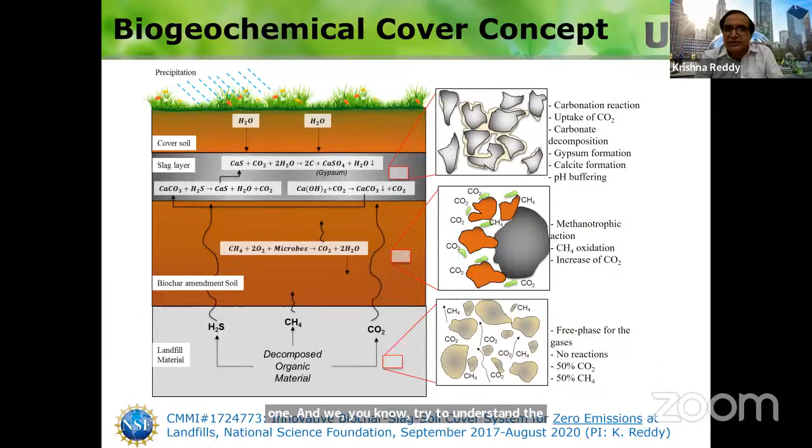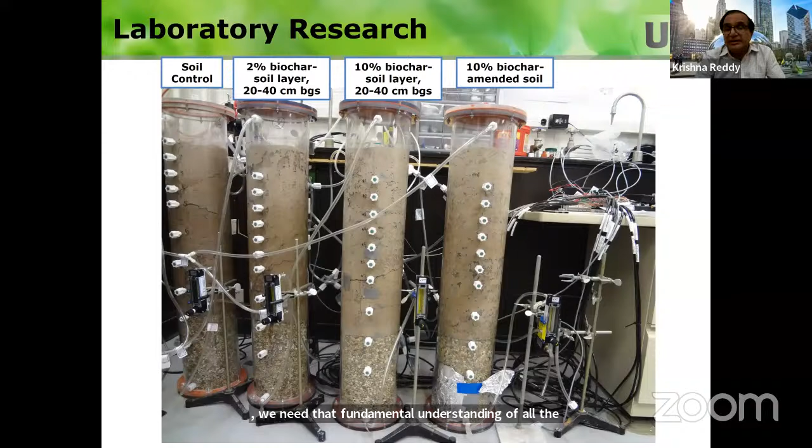We try to understand the chemistry and biology, the more fundamentals of this, through lab research. We do extensive lab experiments, controlling the different variables. As I said, we need that fundamental understanding of all the processes that happen, and just the lab research is not enough. You need to go out to the field and see if the optimized design you came up with through the lab research is going to work in the field.

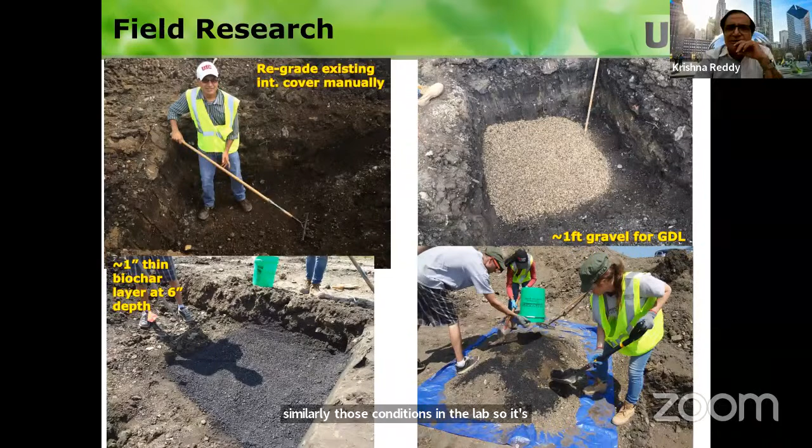Because you cannot simulate everything that happens in the field in the lab, especially the weather and environmental conditions. For example, right now it may be too hot, or sometimes it may be too cold, so you cannot simulate those conditions in the lab. So it's very important to do some small scale testing in the field and then see if it works.

Can you hear me, sir?

So we're going to do a sustainability assessment. For example, we did this for two cover systems, and consistently our new cover system can address greenhouse gases tremendously because it doesn't allow any greenhouse gas emissions. It also has other environmental benefits.

So the point I'm trying to make is, now we are creating new solutions, but we should not just look at improving the technical performance of the new solutions. We should also look at the sustainability of the solution, the economic impacts, social impacts, and environmental impacts.

I hope I'm conveying that message. No matter what you are doing in terms of developing new solutions for improving technical performance, that's fine, but go beyond that and address the sustainability issues.

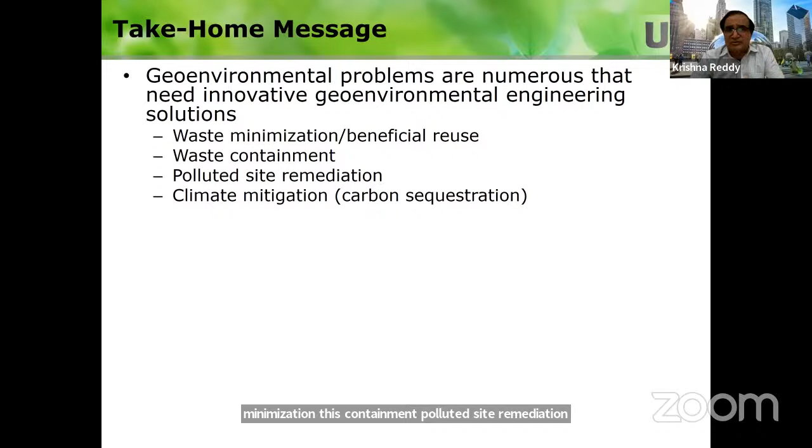So this is my last slide, and I want to take this message home with my presentation. If you are working in the geo-environmental area, there are many problems, and we need innovative geo-environmental engineering solutions. They could be related to waste minimization, waste containment, polluted site remediation, climate mitigation. There are many, many problems - this is a very exciting field, and all of those problems need immediate attention.

So we need to develop innovative solutions, no question about it, but not only innovative, also sustainable. And how can you check whether it is sustainable or not? We need to quantify sustainability using that framework I mentioned - triple bottom line and life cycle. Otherwise, you may say it's sustainable, but you're just saying it without any evidence.

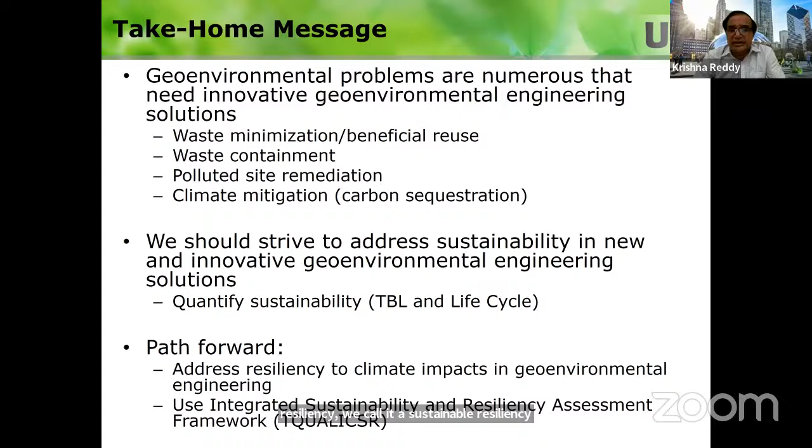Going forward in our research, we look at innovative engineering solutions, we look at sustainability, but now we are also looking at resiliency, because we want to develop sustainable and resilient engineering solutions. We developed a framework we call the IQUALICSR that integrates sustainability and resiliency - we call it the Sustainable Resiliency Index. We calculate that one, and if you're interested, I have some presentation on that, and you can use it for any engineering applications.

I highly recommend you check out all the webinars - we have more than 60, and hopefully some would be very interesting to you. These are given by well-known experts. I really appreciate you going to that website, the YouTube channel, and checking if anything is of interest.

Other resources - you can contact myself by email and look at my website for more information. I know I took a lot of time, but hopefully my presentation is useful. If you have any questions, I'll be happy to answer now, or you can contact me, and I'll be happy to answer anytime in the future. So with that, I want to pass on to the organizers.